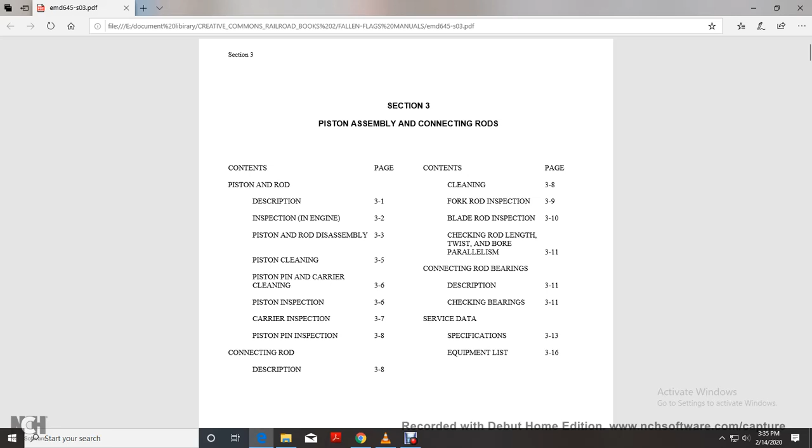Piston assembly, figure 3-1, consists of the cast iron alloy piston, 4 compression rings, 2 oil control rings. A trunnion type piston carrier, figure 3-2, is used for the piston assembly to allow the piston to rotate or float during engine operation.

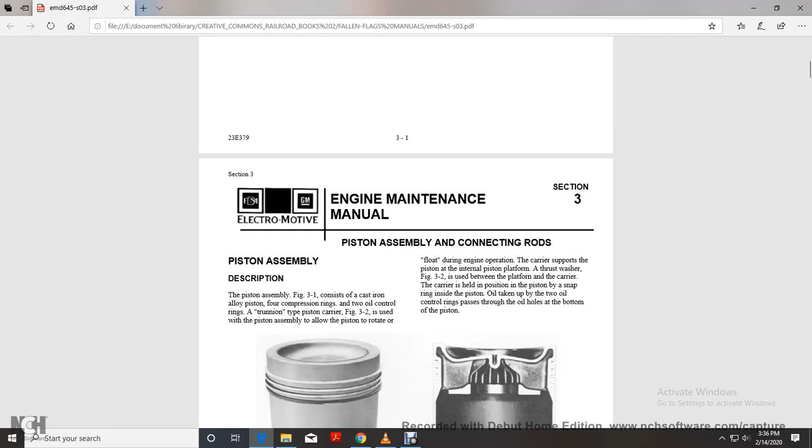It supports the piston at the internal piston platform. A thrust washer is used between the platform and the carrier. The carrier is then held in position by a snap ring inside the piston. Oil taken up from the 2 oil control rings passes through the oil holes at the bottom of the piston. Figure 3-1 shows the piston assembly, and figure 3-2 shows the piston carrier and thrust washer.

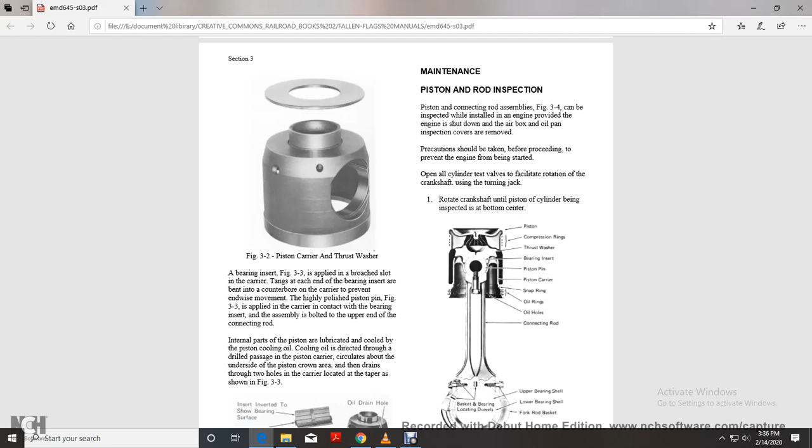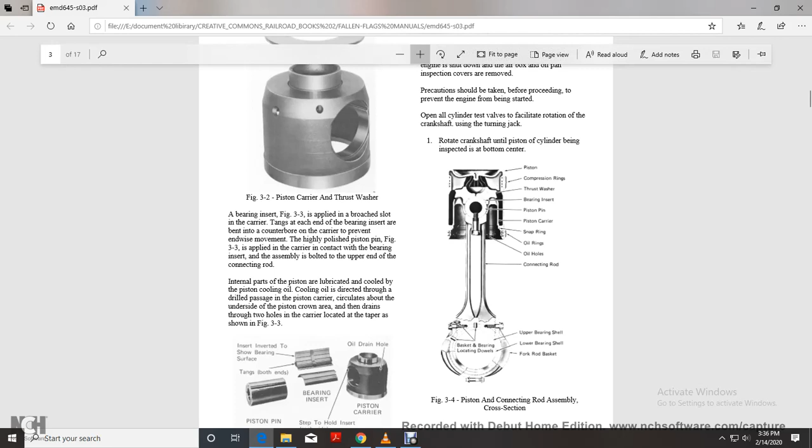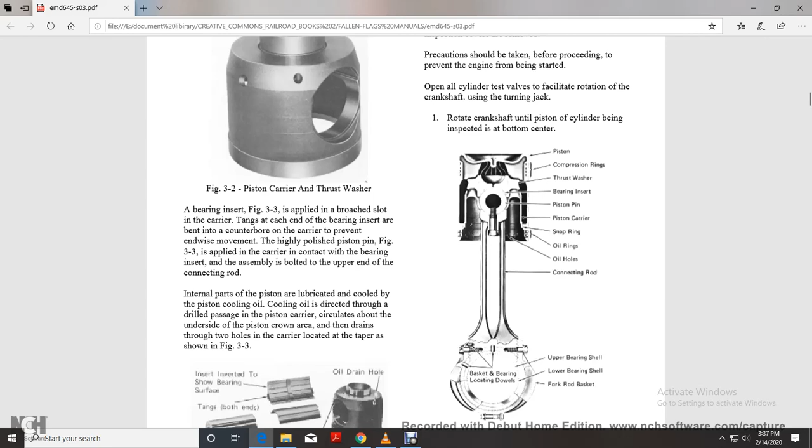A highly polished piston pin, figure 3-3, is applied with the carrier contact bearing insert assembled and bolted into the upper end of the connecting rod.

The internal parts of the piston are lubricated and cooled with the piston cooling oil. The cooling oil is directed through the drilled passage in the piston carrier, circulates about the underside of the piston crown, then drains through the 2 holes in the carrier located at the taper shown in figure 3-3.

Figure 3-3 shows the piston pin insert and carrier insert inverted, showing bearing surface, tang, both end piston pin, bearing insert, step to hold insert, and each side oil drain hole in the piston carrier.

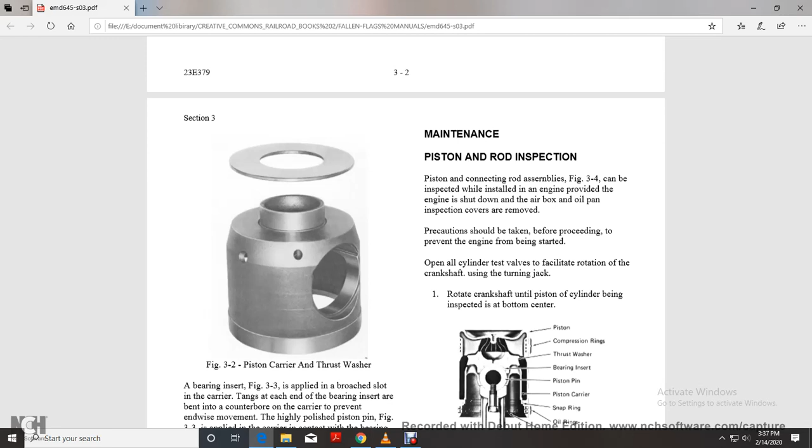For your maintenance, piston rod inspection: the piston and connecting rod assembly, figure 3-4, can be inspected while inside the engine, provided the engine is shut down and the airbox and oil pan inspection covers are removed. Precautions should be taken to prevent the engine from being started. Open all cylinder test valves, facilitate rotation of the crankshaft using a turning jack. 1. Rotate the crankshaft until the piston of the cylinder being inspected is at bottom center.

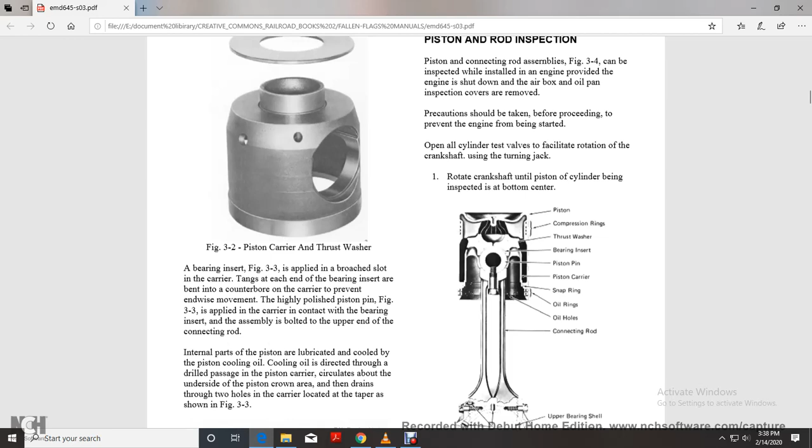Piston compression ring, thrust washer, bearing insert, piston pin, piston carrier, snap ring, oil rings, oil holes, and connecting rod, upper bearing shell, lower bearing shell, fork rod, basket. That is the piston connecting rod assembly cross section.

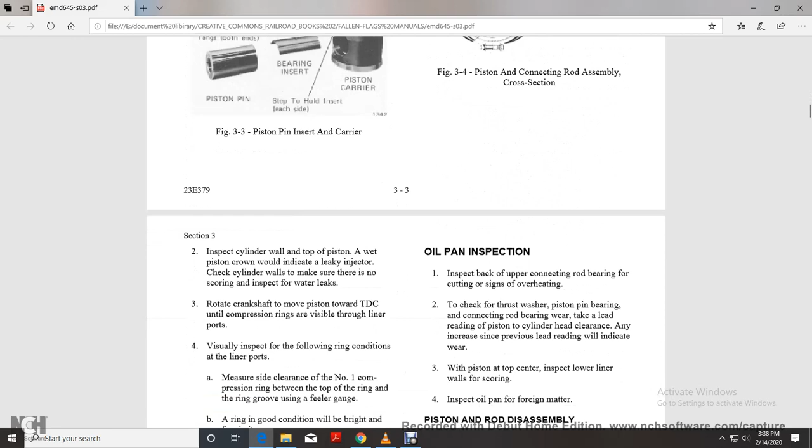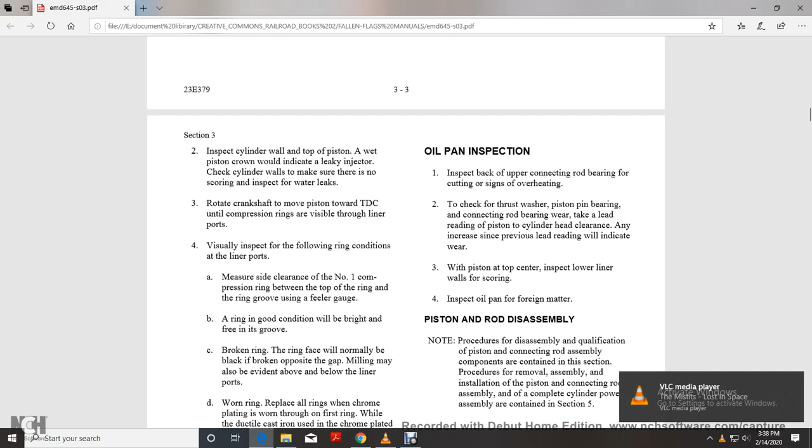Inspect the cylinder wall and top of the piston. A wet piston crown would indicate a leaky injector. Check the cylinder walls to make sure there is no scoring. Inspect for water leaks. Rotate the crankshaft to move the piston to top dead center until compression rings are visible through liner ports. Visually inspect the following ring conditions at the liner ports.

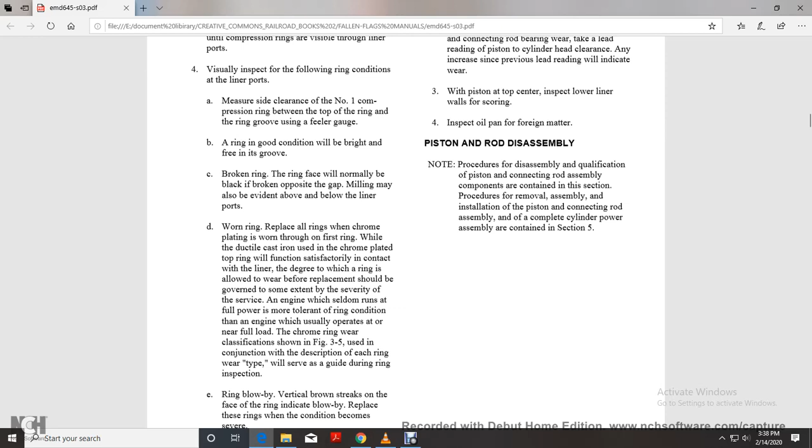An engine that seldom runs at full power is more tolerant to ring condition than an engine that usually operates at or near full load. The chrome ring classification shown in figure 3-5, used in conjunction with a description of each ring and wear type, will serve during ring inspection.

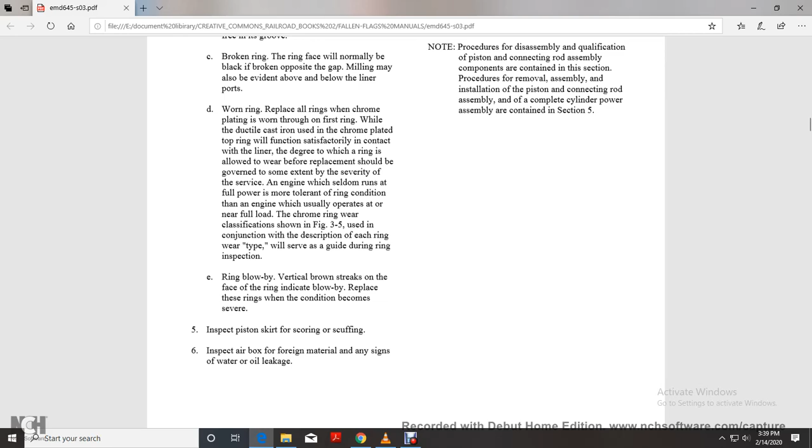Ring blow-by: a vertical brown streak on the face of the ring indicates blow-by. Replace these rings when the condition becomes severe. Inspect the piston skirt for scoring or scuffing. Inspect the airbox for foreign material and any signs of wear, water, or oil leakage.

Oil pan inspection: inspect the back of the upper connecting rod bearing for cutting or signs of overheating. Check the thrust washer, piston pin bearing, and connecting rod bearing for wear. Take a lead reading of the piston and cylinder head clearance. Any increase since the previous lead reading will indicate wear. With the piston at top center, inspect the lower liner walls for scoring. Inspect the oil pan for foreign matter.

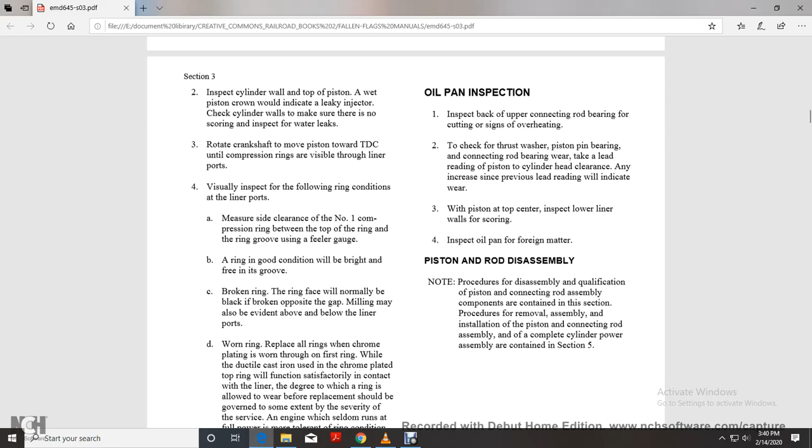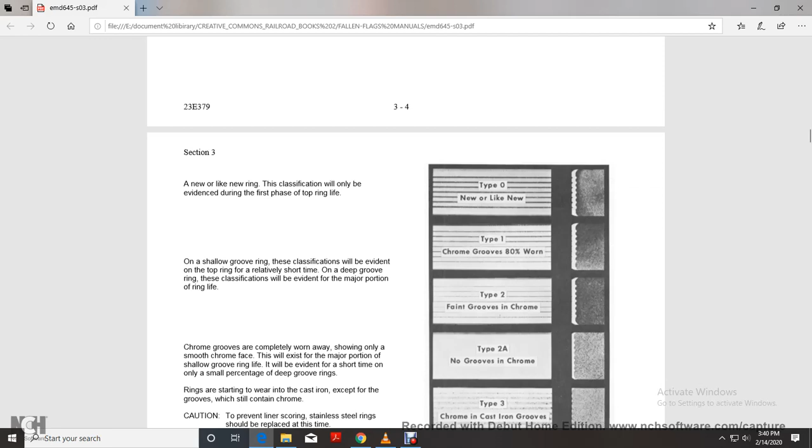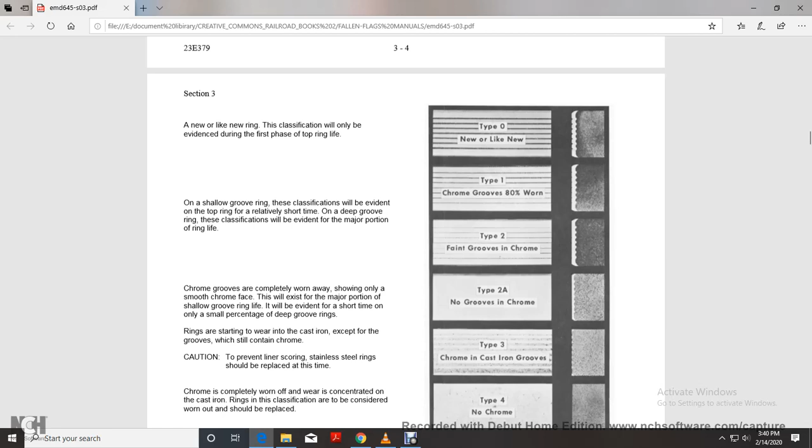Type 3: chrome in cast iron grooves. Rings are starting to wear into cast iron, except that the grooves will still contain chrome. To prevent liner scoring, stainless steel rings should be replaced at this time.

Chrome is completely worn off and wear is concentrated with the cast iron ring; this classification is considered worn out and should be replaced. Type 4: no chrome.

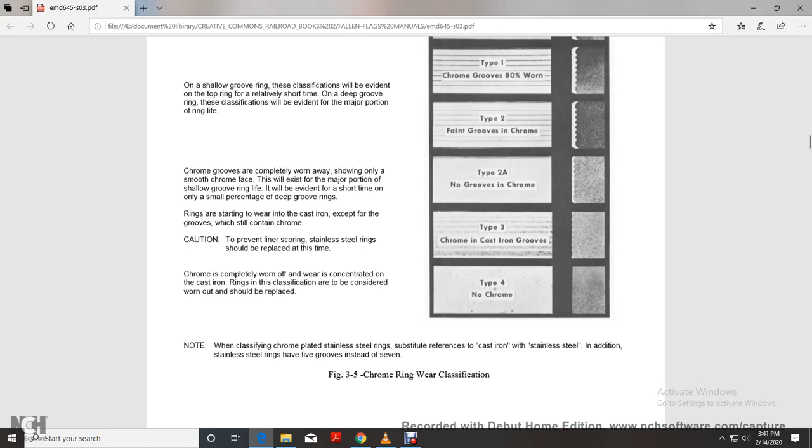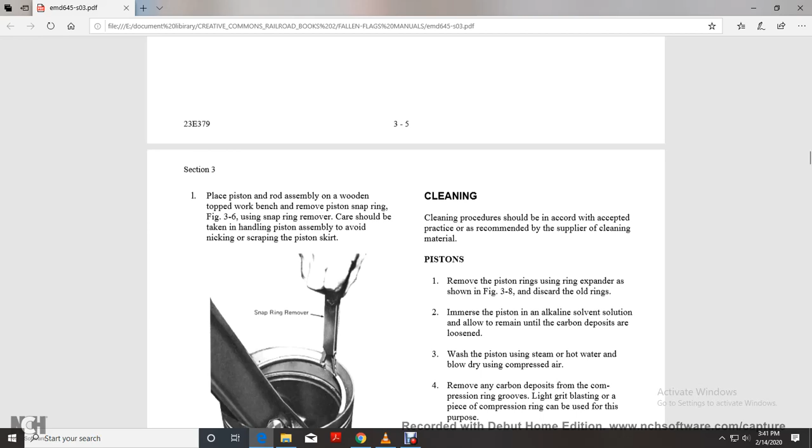1. Place the piston rod assembly on top of the workbench. Remove the piston snap ring, using figure 3-6 for the snap ring remover. Care should be taken when handling the piston assembly to avoid nicking and scraping of the piston skirt.

It must be securely mounted on a work surface; if unavailable, a vise with copper-protected jaws may be used to hold the connecting rod. Clamp the rod horizontally with the pin close to the vise so the pin bolts may be removed without twisting the rod.

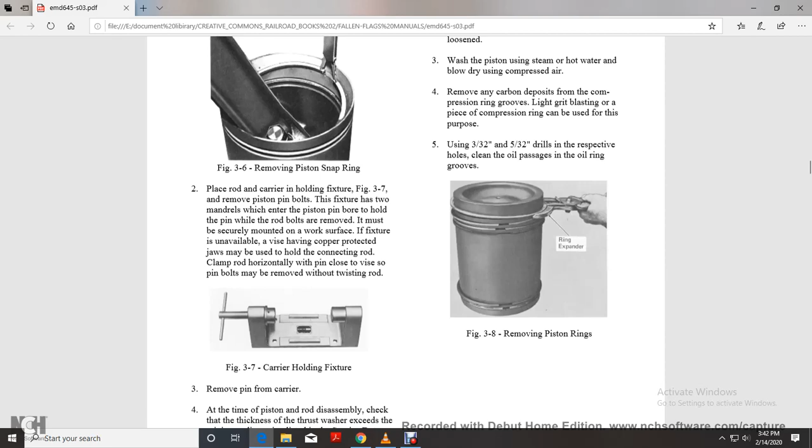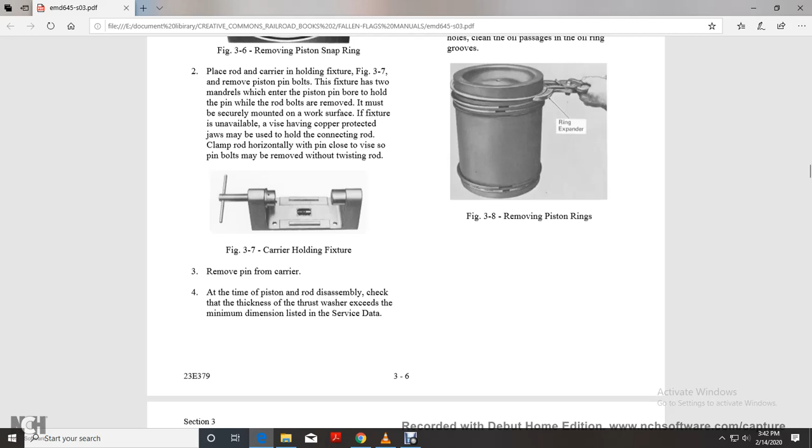3. Remove the pin from the carrier. 4. At the time of the piston and rod disassembly, check the thickness of the thrust washer to ensure it exceeds the minimum dimension listed in service data.

Cleaning: cleaning procedures according to accepted practice. Recommended supplier of cleaning material.

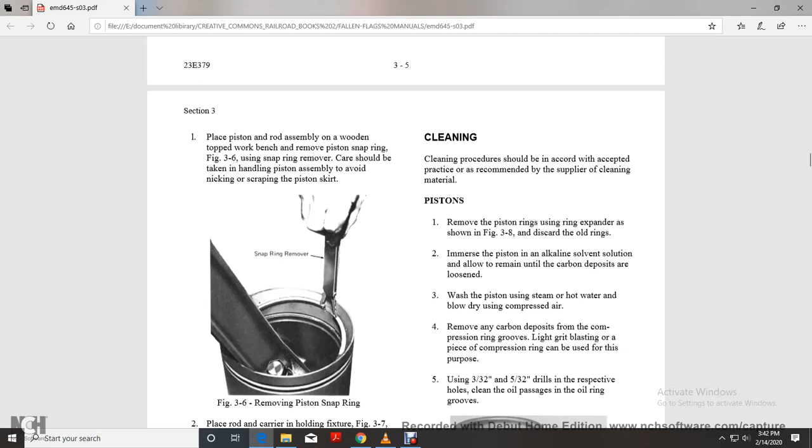Remove the pistons. Remove the piston rings using a ring expander, shown in figure 3-8, and discard the old rings. Immerse the piston in alkaline solvent solution and allow it to remain until the carbon deposits are loosened. Wash the pistons using steam or hot water, then blow dry using compressed air.

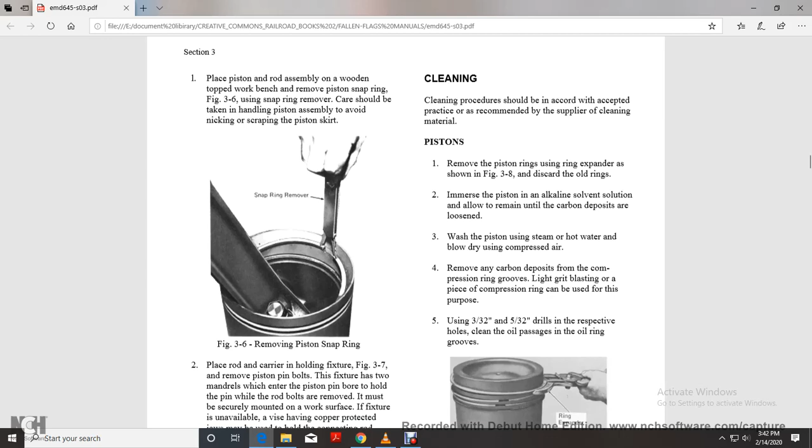Remove any carbon deposits from the compression ring grooves. Grit blasting or a piece of a compression ring can be used for this purpose. Using a 3/32 or 5/32 drill in respective holes, clean the oil passages and oil ring grooves. Figure 3-8 shows removing the piston rings.

Piston pin and carrier. Caution: abrasive material, including steel wool, should not be used when cleaning piston pins and bearing inserts. It is recommended that piston pin carrier assemblies be cleaned using a high flash point petroleum solvent such as Stoddard solvent.

140 degrees Fahrenheit flashpoint or equal. These parts should never be washed with alkaline or caustic solution. Clean the carbon from the oil groove, in the insert with a suitably pointed wooden stick.

Embedded particles do no harm if they do not project above the bearing surface; no attempt should be made to remove them. Parts of the assembly should be adequately protected against rust and corrosion at all times.

Inspection: the phosphate-treated surface of the piston skirt should be inspected for satisfactory condition. If the coating is worn through to bare metal excessively, with approximately 3 square inches exposed, the piston should be recoated. Inspect the piston surface for excessive scoring and other mutilation that would reject the piston.

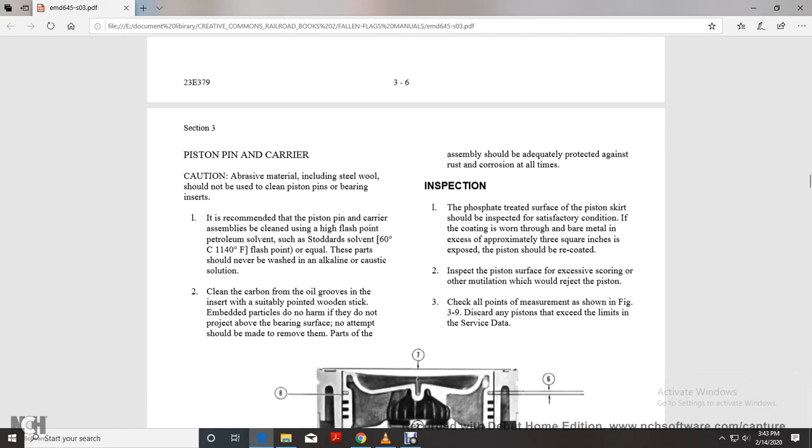Check all piston measurements as shown in figure 3-9. Discard any piston that exceeds the limit in the service data, which shows the piston measurements.

4. Check the piston ring groove wear step, particularly the wear step in the top ring groove, as shown in figure 3-10. Top ring breakage can result from excessive wear step. A piston ring groove gauge, shown in figure 3-11, is available for measurement of the wear step.

Insert the gauge block in the ring groove, and by trial determine the insert which enters for the full depth, which will indicate the original width of the ring groove being measured. Insert the largest block that will enter the groove above the wear step. This size of the wear step is determined by subtracting the small block dimension from the large block dimension.

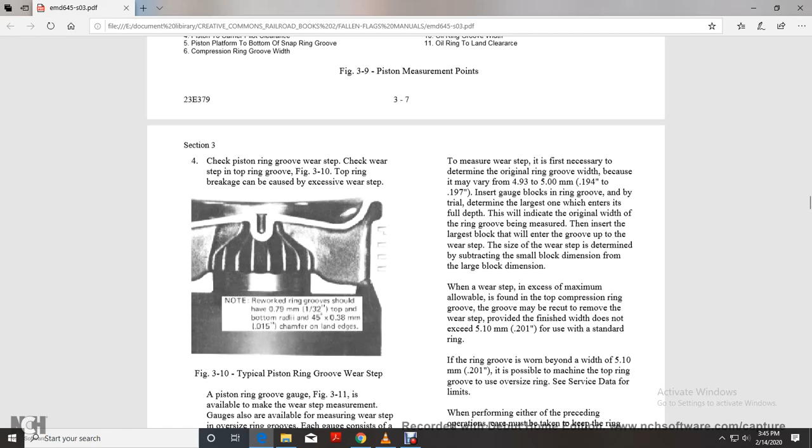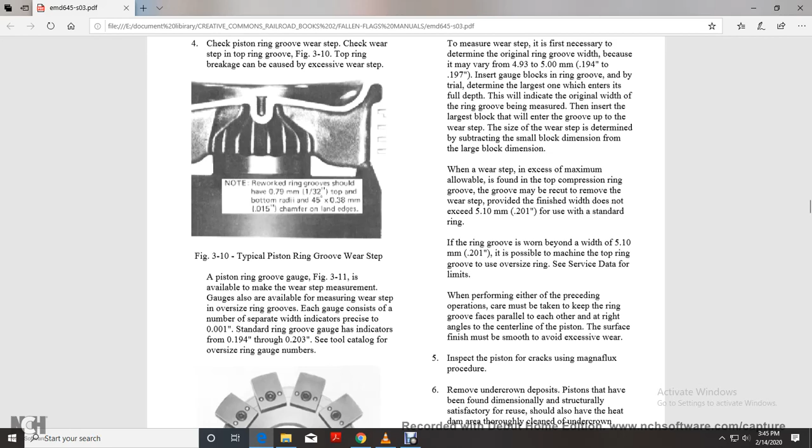Wear step is an excessive maximum allowable found with the top compression ring groove. The groove may be recut to remove the wear step if the finish does not exceed 201 thousandths of an inch for use of a standard step ring. If the ring groove is worn beyond a width of 201 thousandths of an inch, it is possible to machine the top ring groove to use an oversized ring. See Service Data with the limits.

When performing either of the preceding operations, care must be taken that the ring groove faces are parallel to each other and at a right angle with the center line, and that the surface finish must be smooth to avoid excessive wear.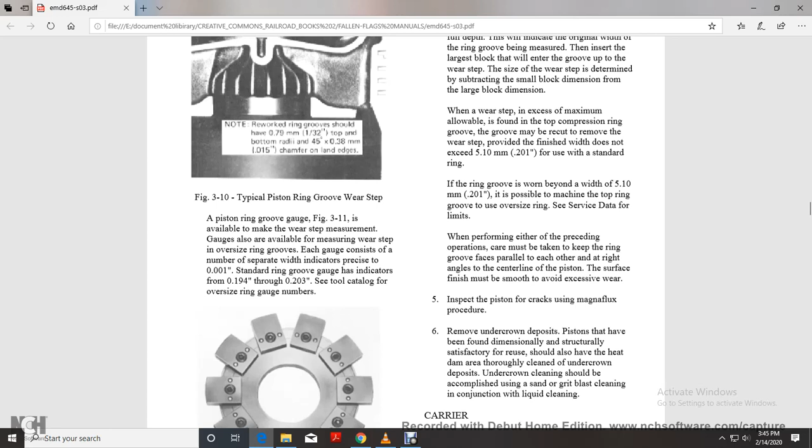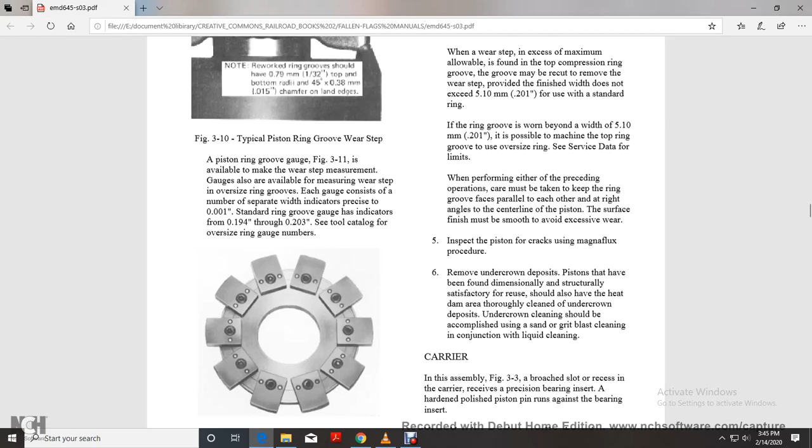Inspect the piston for cracks using the Magnaflux procedure. Remove undercrown deposits to determine that pistons have been dimensionally and structurally satisfactory. You should also have the heat dam area thoroughly cleaned of undercrown deposits. Undercrown cleaning should be accomplished using sand or grit blast cleaning in conjunction with liquid cleaning.

The carrier, as assembled in figure 3.3, has a broach slot and recess in the carrier that receives the precision bearing insert, with the hardened polished piston pin running against the bearing insert. Normal bearing wear does not affect the carrier. The maximum permissible wear of the insert and piston pin and carrier pilots are listed in Service Data.

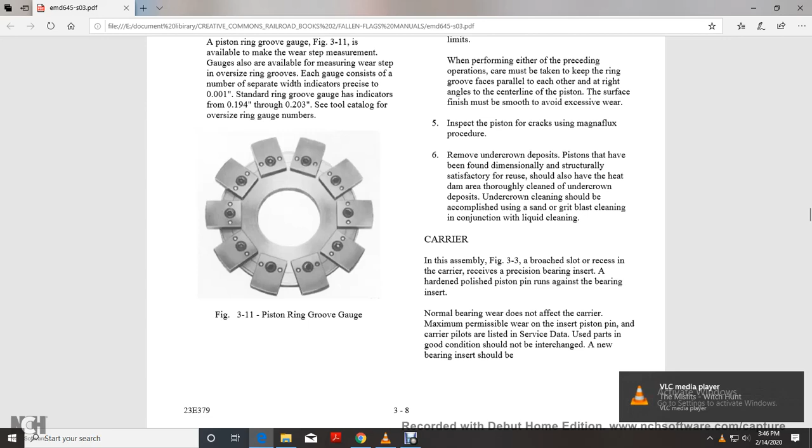The small hole of the piston pin should be matched with the piston cooling oil hole. In the carrier, convenient means of keeping the pin insert in the same relative position provides maximum performance, except in extraordinary cases of pilot wear, the carrier may be expected to last indefinitely.

All of the tile bearings need not be removed for measurement, unless the appearance is questionable and the wear of the piston or pin is well advanced. Measure the carrier to determine the dimension. Do not exceed the limits of the Service Data.

Check the piston for wear step. Check the piston pin for wear step.

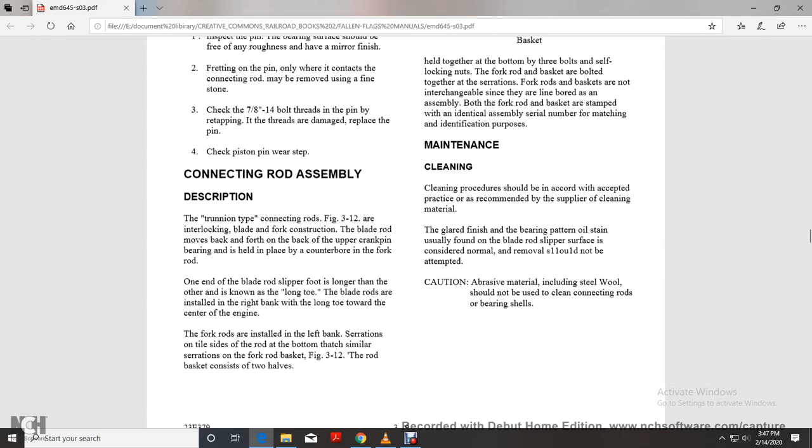The rod basket consists of two halves held together at the bottom with three bolts and self-locking nuts. The fork rod and basket are bolted together. Fork rods and baskets are not interchangeable since they are line bored as a matched assembly, with the fork rod basket stamped with an identical serial number for matching identification purposes.

Figure 312 shows the connecting rod bearing shells and basket, showing the rod to pin bolt, blade, upper bearing shell, lower basket bolt nuts, fork rod, basket, lower basket bolts, lower bearing shell, and upper basket bolts and fork rod.

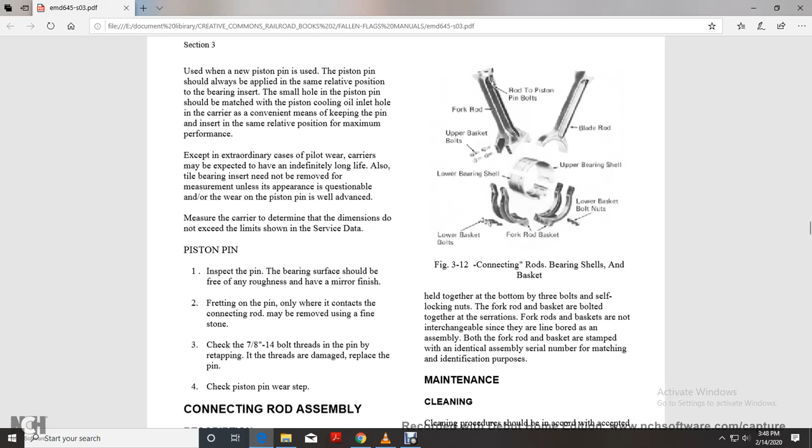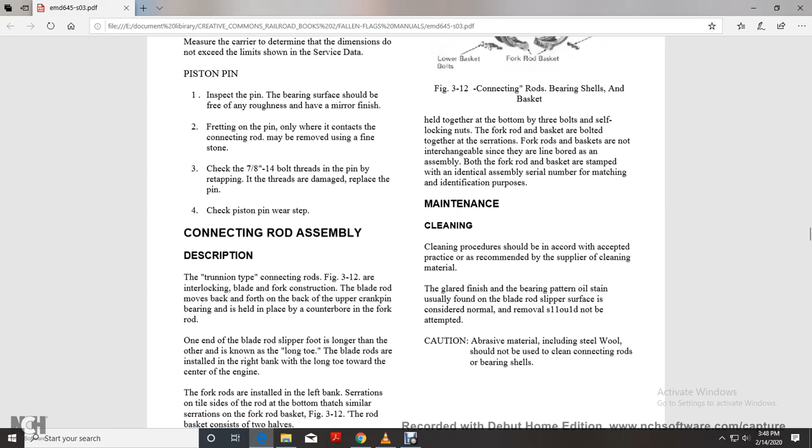Maintenance: the cleaning procedure should also be in accordance with the recommended practice of the supplier of the cleaning material. The glared finish and bearing pattern oil stain usually found on the blade rod slipper surface is considered normal; removal should not be attempted. Abrasive material, including steel wool, should not be used when cleaning connecting rods or bearing shells.

For inspection of the fork rod, all parts should be checked after cleaning, with attention to the fork rod threads. Worn bolts holding the basket may loosen during operation, causing damage to the engine.

A plug gauge, figure 313, is available to check the fork rod bolt threads. Open the gauge; it's marked GO on one end and HI on the opposite end. Thread the GO portion of the gauge into the hole shown in figure 313 and check for binding, which may indicate damage to the threads. Normally the gauge should enter the hole freely, with a slight shake or wobble permissible.

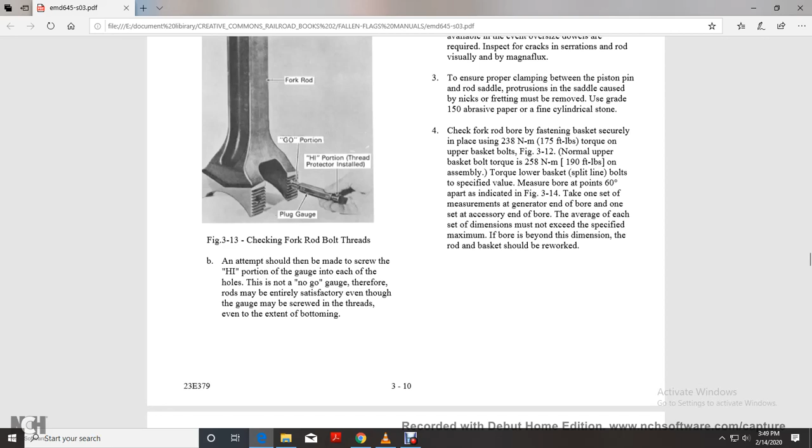So you have the fork rod GO portion, and then the HI portion protector with a plug gauge. An attempt should then be made to screw the HI portion of the gauge into the hole. This is not a no-go gauge; the rod may be entirely satisfactory even though the gauge may be screwed into the threads, even to the extent of bottoming out.

Normally, in rods with little wear, the gauge will have difficulty threading into the hole beyond a couple of turns. In many cases, however, the gauge can be threaded into the rod and will be snug tight and thread in with a slight shake or wobble. Take care that the gauge is not bottomed in the hole, which will cause binding or a false reading. The fork should be scrapped if shake or wobble is experienced with the HI gauge.

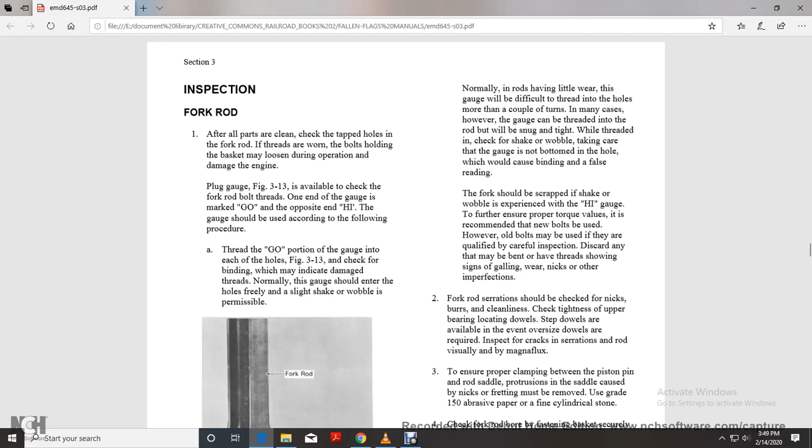Proper torque values are recommended with new bolts. Used or old bolts may be used if they are qualified, but a careful inspection should be made, as they may be bent or have thread damage showing signs of galling, wear, nicks, or other imperfections.

Fork rod serrations should be checked for nicks, burrs, and cleanliness. Check for tightness of the upper bearing locating dowels; step dowels are available in the event oversize dowels are required.

Inspect the serration areas visually for cracks, and Magnaflux the rod. To ensure proper clamping between the piston pin and the rod, saddle protrusion caused by nicks and fretting must be removed. Use grade 150 abrasive paper or a fine cylindrical stone.

Check the fork rod bore by fastening the basket securely using 175 foot-pounds of torque. Normal upper basket torque is 190 foot-pounds. On assembly, torque the lower basket split line bolts to the specified value.

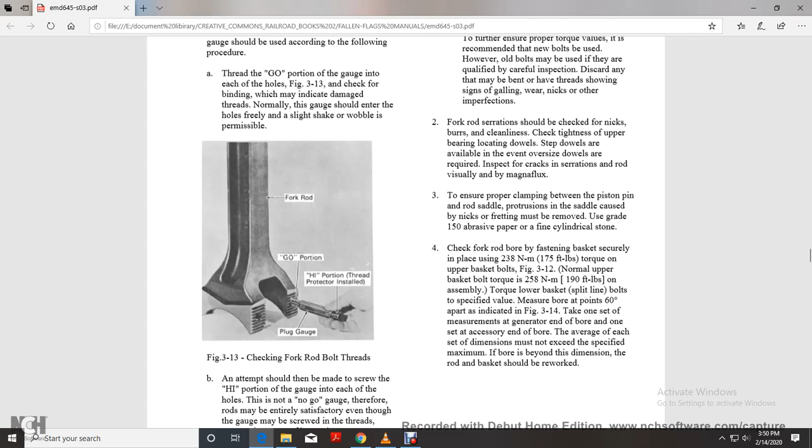Measure the bore at 60 degree intervals as illustrated in figure 3-14. Take one set of measurements at the generator end bore and one set at the accessory end bore. The average of each set of dimensions must not exceed the specified maximum limit. If this dimension is exceeded, the rod and basket should be reworked. Figure 314 shows checking the fork end bore.

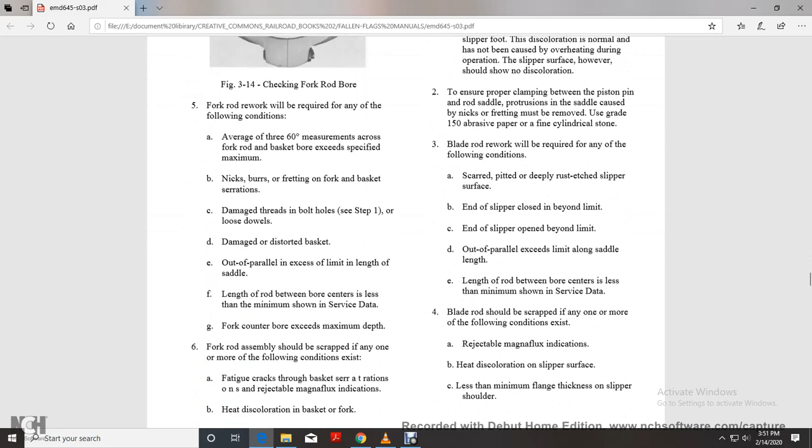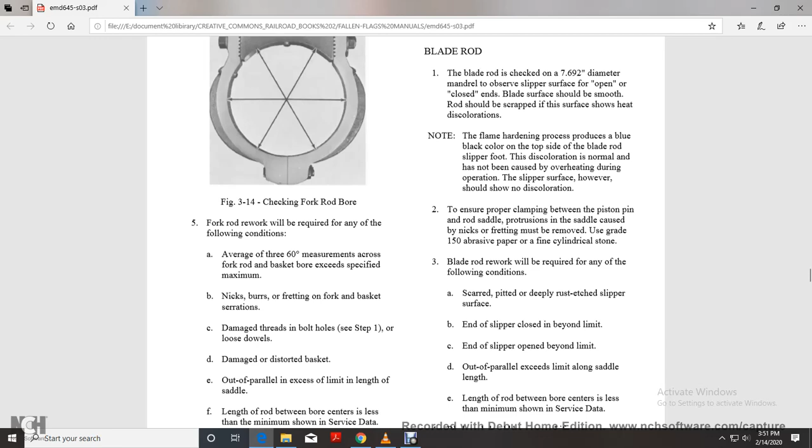Rework will be required for any of the following conditions: average of the measurements across the fork rod bore basket exceeds specified maximum; nicks, burrs, and fretting on the fork or basket serrations; damaged threads in the bolt holes or loose dowels; damaged or distorted basket; out of parallel beyond limit along the saddle length; length of the rod between bore centers less than minimum shown in figure or service data; or fork counterbore exceeds maximum depth.

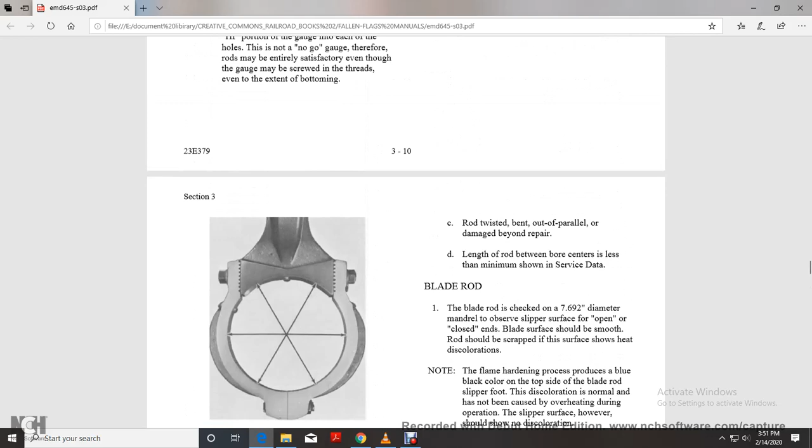The fork rod assembly should be scrapped if any one or more of the following conditions exist: fatigue cracks through the basket serrations, a rejectable Magnaflux indication, discoloration of the basket fork, rod twisted or bent out of parallel beyond repair, or length of the rod between bore centers less than the minimum in the service data. Your blade rod is checked on...

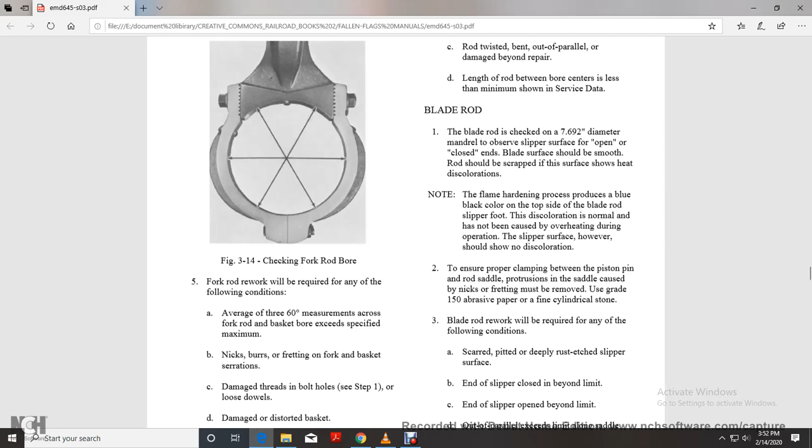a 7.692 inch diameter mandrel to observe slipper gap at the open or closed ends. The slipper surface should be smooth. The rod should be scrapped if the surface shows heat discoloration. Note that the flame hardening process causes a blue-black color on the top side of the blade rod slipper foot; this discoloration is normal and has not been caused by overheating during operation. The slipper surface, however, should show no discoloration.

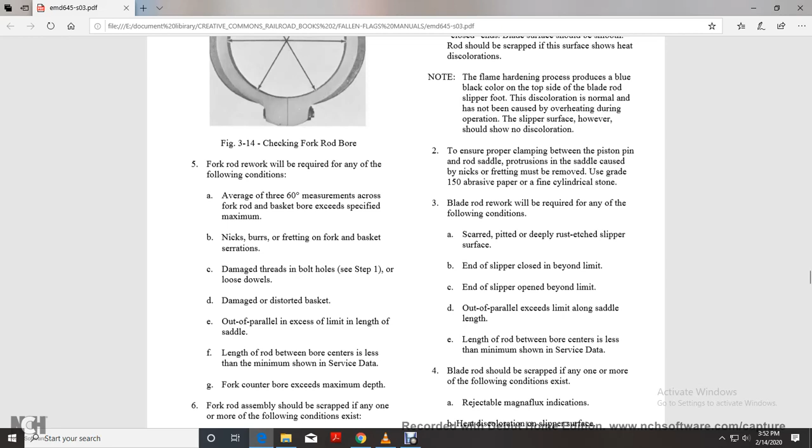To ensure proper clamping between the piston pin and the rod assembly, protrusion at the saddle caused by nicks and fretting must be removed. Use grade 150 abrasive paper or a fine cylindrical stone.

Blade rework will be required for any of the following conditions: scarred, pitted, or deeply rusted slipper surface edge; slipper closed beyond limit; slipper open beyond limit; out of parallel beyond limit along the saddle length; or length of the rod between bore centers less than the minimum shown in service data.

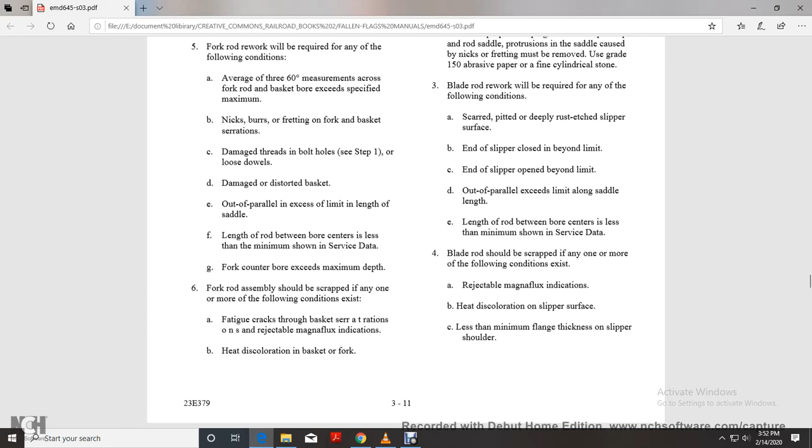The blade rod should be scrapped if any one or more of the following conditions exist: rejectable Magnaflux indication, heat discoloration on the slipper surface, less than minimum flange thickness at the slipper shoulder, rod twisted or bent out of parallel beyond repair, or length of the rod between bore centers less than the minimum rework limit in service data.

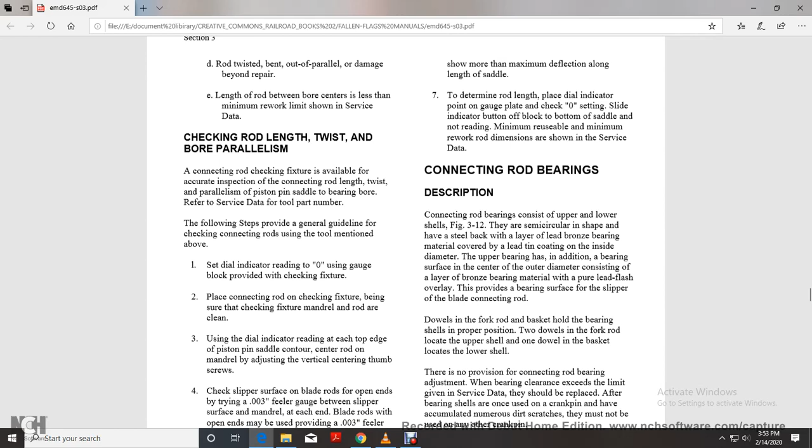Checking the rod length and the twist of the bore parallelism. Connection rod: checking fixture is available the accurate inspection of the connection rod length, the twist, and the parallelism of the piston pin saddle to the bearing bore. Refer to service data with the tool part number. The following steps provide a general guideline for checking the connection rod using the tool mentioned.

Set dial indicator reading to 0 on the gauge. Provide the checking fixture. Place the connection rod on the checking fixture. Be sure that the checking fixture mandrel and rod are clean.

Use the dial indicator reading of the top edge of the piston saddle or contour center rod mandrel, adjusting the vertical center thumb screws. Check the slipper surface of the blade rod for the open end with a 0.003 inch feeler gauge between the slipper surface mandrel of each blade rod, which will open up and may be used if the feeler gauge cannot be inserted on both ends.

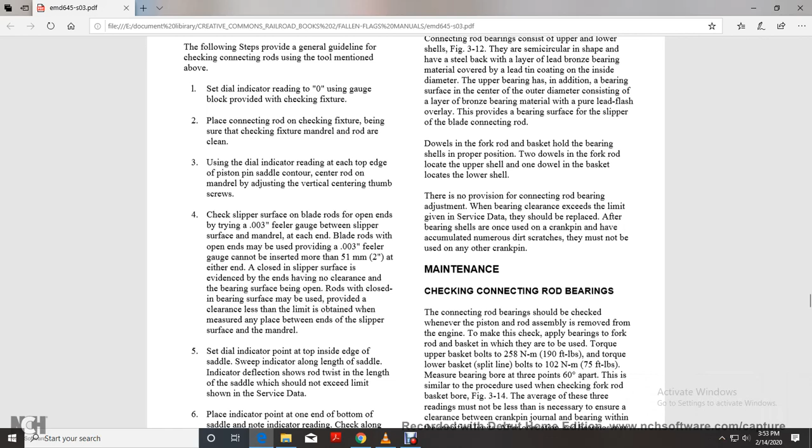The close end slipper surface evidence of having no clearance shows the bearing surface being open. The rods and closed bearing surface may be used provided the clearance is less than the limit, measured at any place between the end of the slipper surface and mandrel.

Set the dial indicator point to the top of the inside edge of the saddle. Sweep the indicator along the length of the saddle. Indicator deflection shows rod twist the length of the saddle, which should not exceed the limit shown in the service data.

Place the indicator point at the end of the bottom saddle, and note indicator reading. Check along the length of the saddle. Bottom circumventing bolt holes to check parallel - the indicator must not show more than maximum deflection along the length of the saddle.

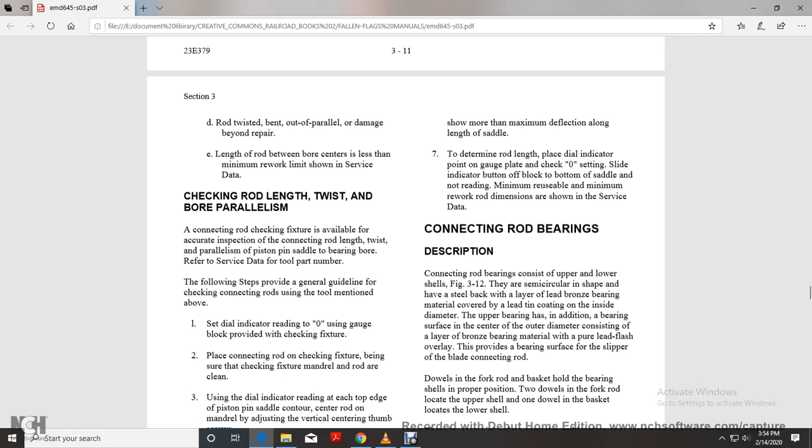Step 7: Determine the rod length by placing the dial indicator on the gauge. Check the 0 setting. Slide the indicator button off the block at the bottom of the saddle, with no reading. Maximum reusable and minimum rework dimensions are shown in the service data.

Connection rod bearings: description. Connection rod bearings consist of upper and lower shells with a semicircular shape that have a steel back with a layer of leaded bronze bearing material covered with lead-tin coating on the inside diameter. The upper bearing has an addition of bearing surface at the center of the outer diameter, consisting of a layer of bronze bearing material with pure lead flash overlay that provides the bearing surface for the slipper of the bearing blade connection rod.

Dowels in the fork rod and basket hold the bearing shell in the proper position. Two dowels on the fork rod locate the upper shell, and one dowel in the basket locates the lower shell.

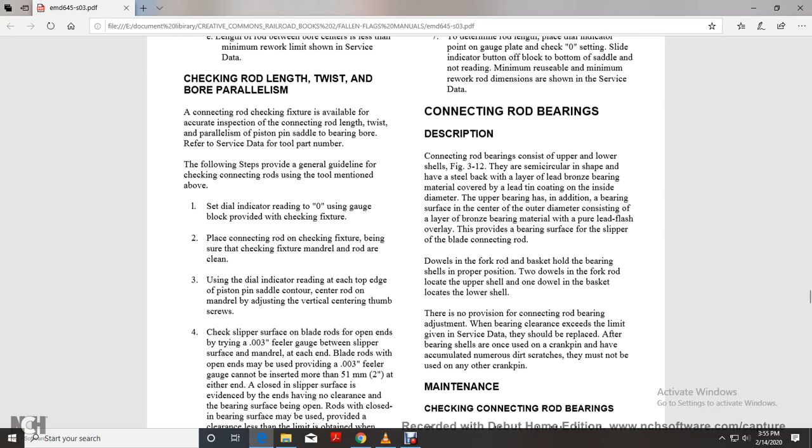There's no provision for connection rod adjustment, and when bearings exceed the limit given in the service data they should be replaced. After bearing shells have been used on a crank pin and have accumulated numerous dirt and scratches, they must not be used on any other crank pin.

Maintenance: checking the connection rod bearings. The connection rod bearings should be checked whenever the piston and rod assembly is removed from the engine. To make this check, apply the bearings in the fork of the rod and the basket in which they are to be used. Torque upper basket bolts to 190 foot-pounds, lower bolts to 75 foot-pounds.

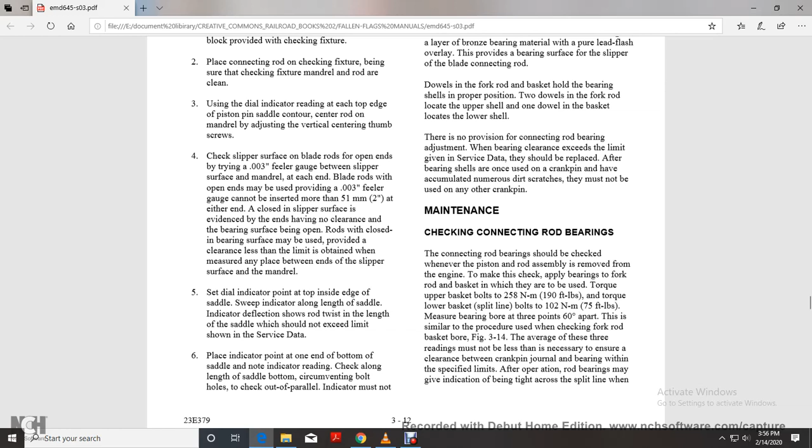Measure bearing bore at 3 points, 60 degrees apart, similar to the procedure used when checking the fork rod basket bore (Figure 3-14). The average of the 3 readings must not be less than necessary to ensure the clearance of the crank pin journal bearing is within the specified limits.

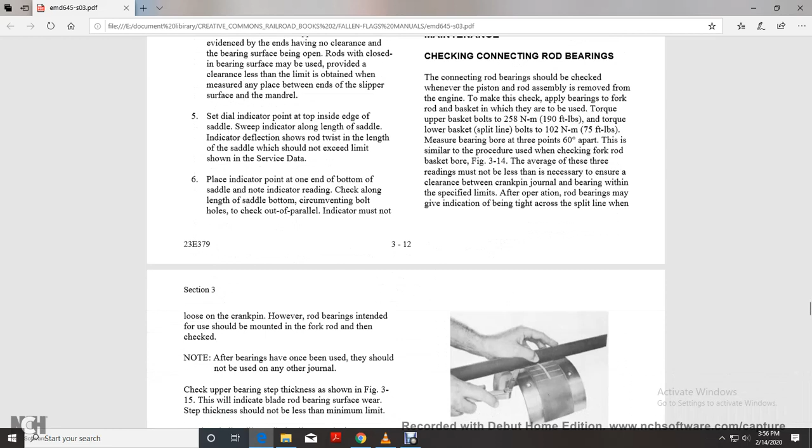After operation, the rod bearings may give an indication of being too tight across the split line when loose on the crank pin. However, the rod bearings intended for use should be mounted on a fork rod and then checked. After bearings have been used once, they should not be used on any other journal.

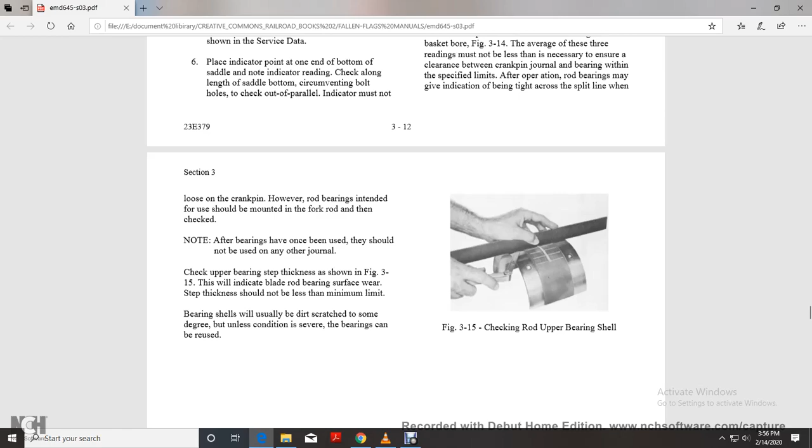Check the upper bearing step thickness (Figure 3-15) to indicate blade rod bearing surface wear. Step thickness should not be less than the minimum limit. Bearing shells will usually be dirty and scratched to some degree - unless the condition is severe, bearings can be reused. Figure 3-15 shows checking the rod and upper bearing shell.

And then you have your service data.